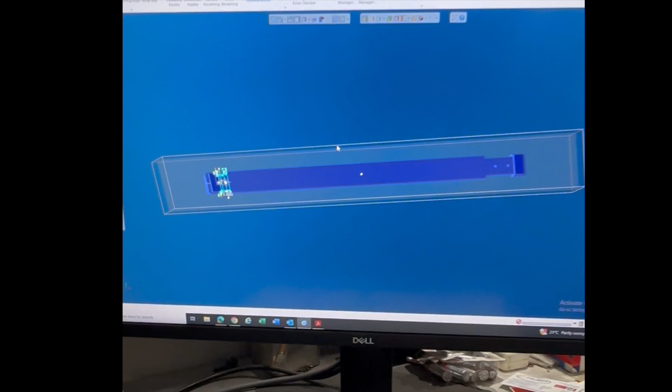We'll get it going for you. Okay, so here you can see we have a part. I've already drawn the previous one, but what I like to do in Gibbs is use all the same tools and basically the exact same processes. It's just a different part, so it's like a family of parts. So what I like to do is draw it with what we have, and then I'll use the same tooling to do the job.

So here we go, I got her set up. As you can see, it's 185 inches long. And I kind of have not the best setup, but hey, it'll get the job done. Sometimes that's what we got to do. So yeah, well, I got X, Y, Z, 0 all picked up, and we'll get into it.

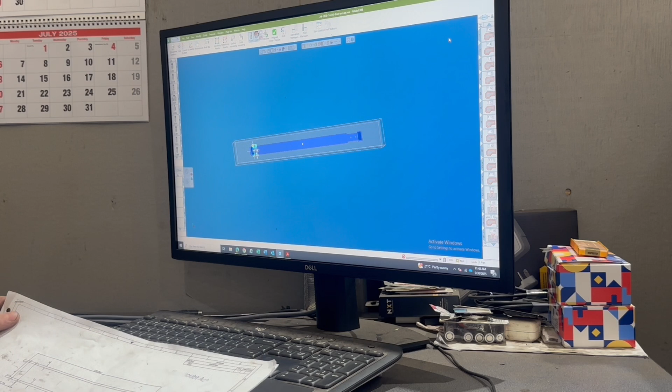So we'll start with building the model. Okay, so we'll get started, and if you have any questions along the way, just ask, write a comment. I'd be very happy to help you guys out with a problem or to show you how I've done something.

That's fine with me. So what we're going to do here now is we're going to keep our processes, and we're going to use the same process, same tooling, just on a new part. So we'll get rid of this part, keep it in my body bag, and I also want to keep the geometry.

So what I'd like to do is create a new work group. So that's now, get rid of work group 1, I'll leave that. So we got work group 2 and 3. So we'll keep going with 2.

Okay, so what we'll be using in this video, I'm going to be using the geometry tab, is this guy. We're going to be using the solid modeling tab, and we're going to use some of the features inside of here. This is a pretty basic model, but it's a good way to show you guys how it works.

Okay, so when building, you got to start off with your datums and your zeros, and that drawing will call that out. So here we go.

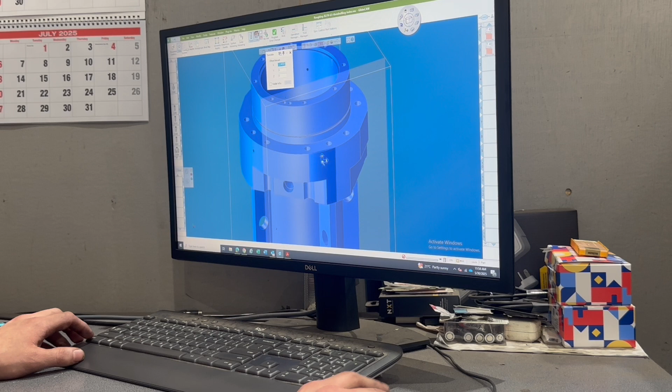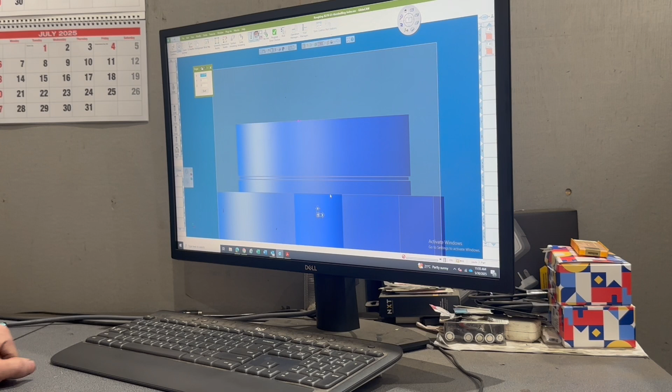All right, so you guys just saw some live action there. That's pretty damn fun. That's how shop life goes, right there, boys. Ladies and gentlemen, sorry, I won't look at those boys, include everybody. Yeah.

So, in short terms, what we just did there, we just finished drilling and thread milling this hole here on this face. Now we need to rotate and pick up my zero from the knot in the center of the table. He's going to put a bolt in here, and he just asked me for the dimension to the center of this hole. So that's what we just did there. And now we can go back. Hopefully it's lunch, so the guys leave us alone, but we did it for a bit. Shop life.

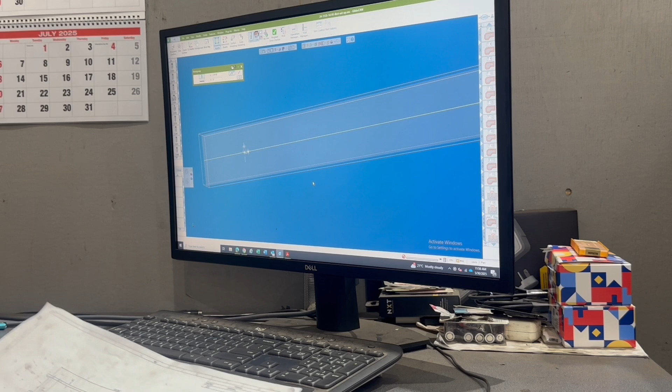Okay, so now we'll start plugging in the dimensions of what we're going to be working on and what we're going to be building.

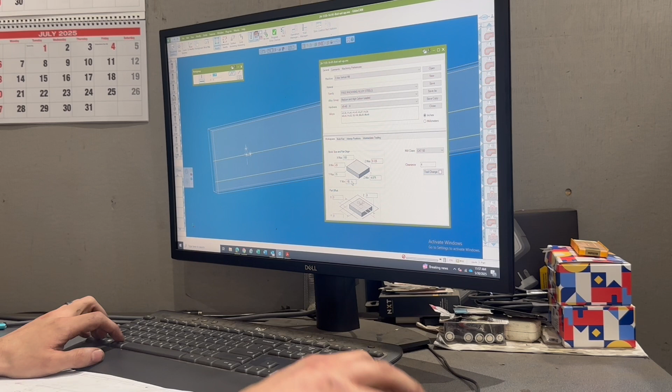Do the larger part, so I'm going to make the very single... okay, so off my zero.

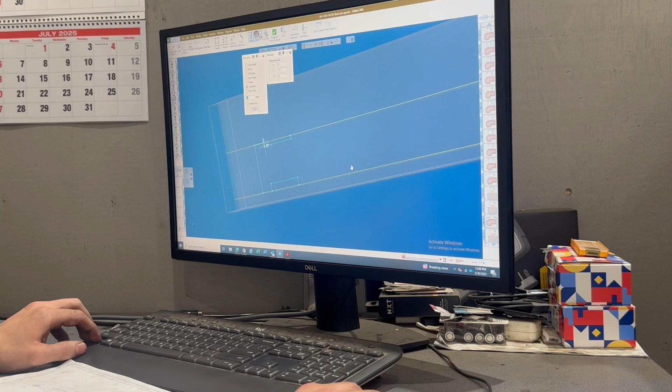Okay, so now we've created our pocket, our cart. Basically, we just created this edge here. So now we're just going to follow our dimensions and we're going to create this side.

From my 0 to that other shoulder is 173.75. So, 173.75 to it. Whoa, come on. Yeah, I didn't even adjust my screen. So 100. And let me go that way.

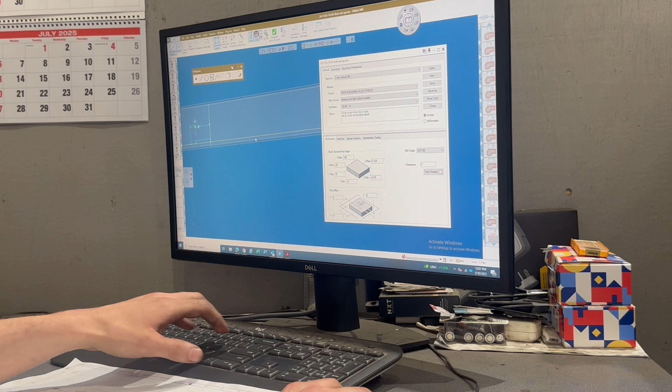If you don't adjust your screen, as you can see here, the geometry will not extend out that way. So these two pieces, I gotta delete these guys, put them back in. It's not a problem.

Okay, so now as you can see, we'll have our full length. A little trick: if you also don't have that window, you won't be able to go out and machine outside that window either with that geometry. It won't allow you. So this is almost like it's your geometry and processing machining window, let's say.

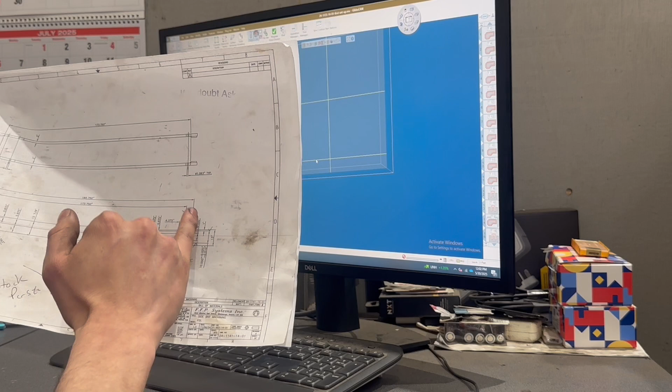Okay, so now we got those straightened out. Let's put our line now back at 173.75. Turn right, yeah. Okay, now I like to use duplicate the transfer because I have all details in here from that 173.75 dimension.

Now, 104.75. Create this step again. I do want this. Oh, you see? Because I created that in that window, now it won't let me. That's fine.

So we just create a new line. Likewise here, boom. Okay, so now I've created the pocket. Oh, just also a good one: if you're using geometry and the tab's still active, it's going to activate every line. So it's almost like it's a sticky function. It kind of sucks, got to make sure you exit out of that function. And then you can continue marking.

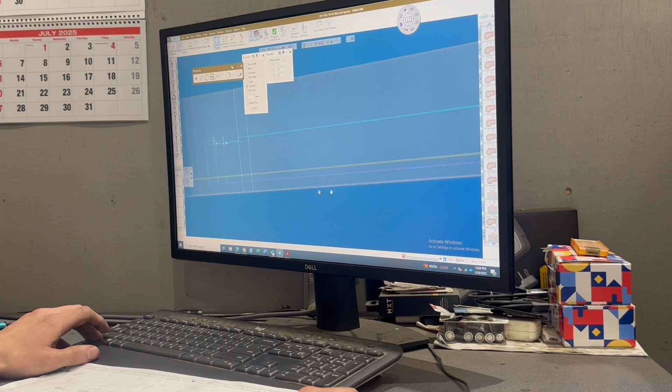What do we got going on here?

Okay, so now this is our basic geometry, and if you're worried about what you've done, you can now come in and select your dimensions. And a little trick with dimensions is you got to press and hold Control-Alt to get your size. It won't go there, but double check before you make your model.

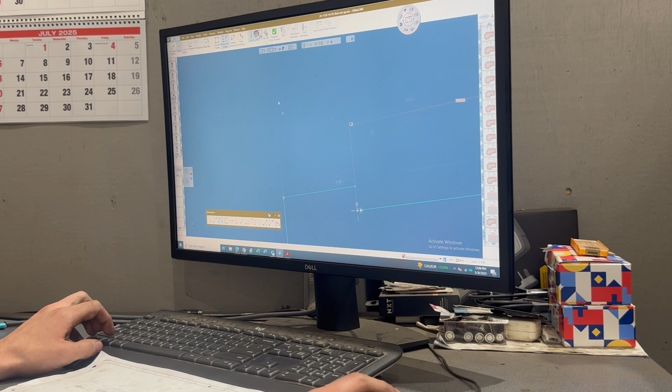You need 16, I need 6. Holy fuck. There we go. And I need 13. Boom. Nice.

173.5 for... 173.75 and length. Right on 1, and wide here at 0. Beautiful. Beautiful. And I should have...

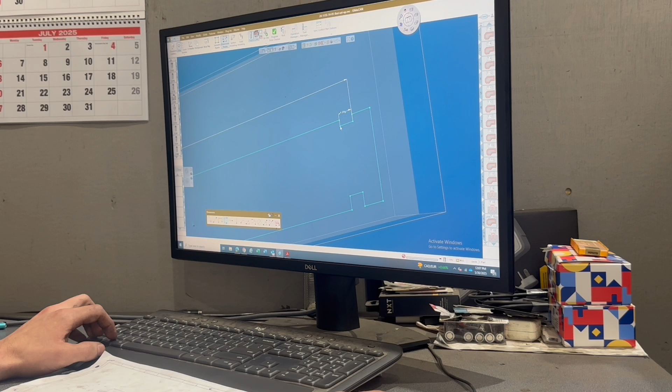Okay, and now we actually can take this geometry and make a model. Well, let's do that.

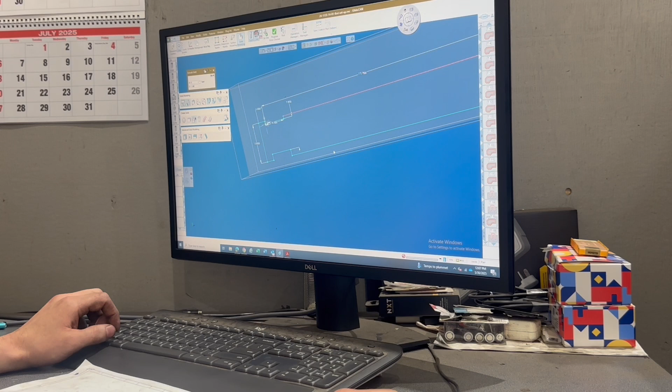Modeling tab function, we're going to use this one, create a solid, extrude a solid. So right now we want to go on Z, we don't want anything, that's our 0. And we're using 2-inch plate, so Z minus 2 inches. Do it. Select the geometry of the shape you want to do and select do it. Boom.

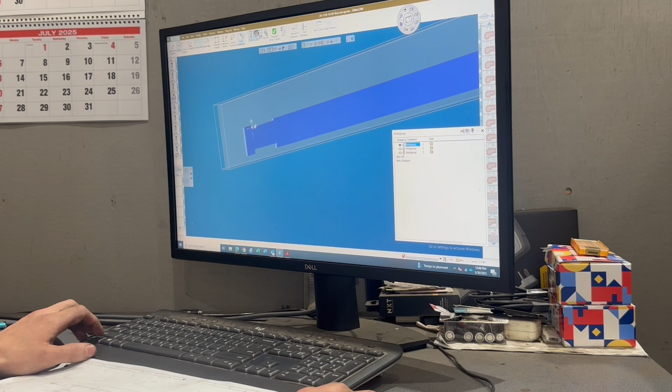We don't want a chamfer, we want a 1-inch radius. So we select radius, 1 inch. Have your edge selection activated, select the edges that you want to do. Okay, for the other side, same thing. Do it. Boom, we have a nice 1-inch edge. Love it.

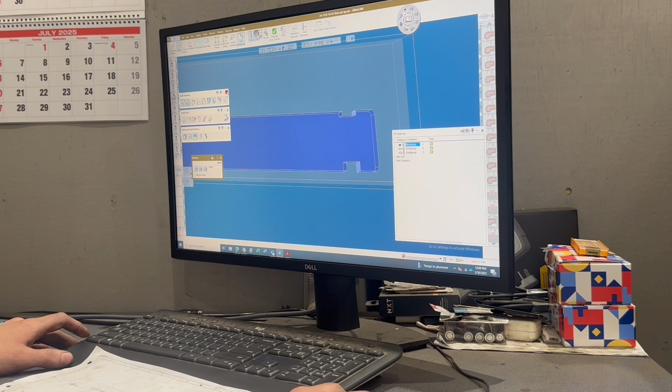Okay, now all you gotta do is cut the holes in it. Okay, so now we'll set our origin. X0 is already in place, Y0 is already, X0 is in place, Z0 is in place. We need to shift our Y down 5.875.

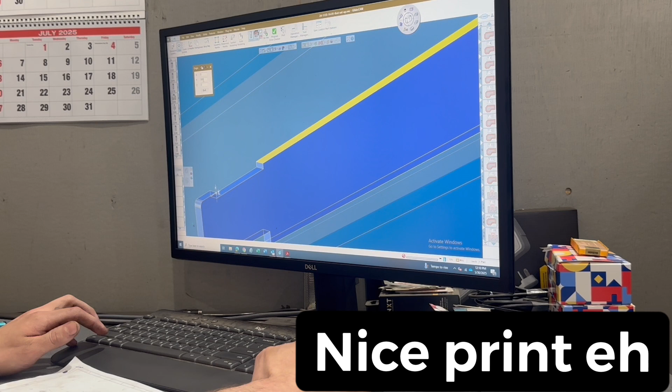So now, from edge to edge, that will give me... oh, no, oh, I'm in the pocket, sorry. Move my origin up. This face here is our origin, although the datum comes from it. Now we need to go minus 5.875. Enter.

Now if I check the top edge, it should be a positive 5.875, which we have. And then the bottom should be 6 inches. And it's not, why not? Oh, sorry, 13. Okay, so we got 5.875, and we have 7 inches to the bottom of it.

Let's slam our hole. So they're on our Y center line. Oh. Y0. Do it.

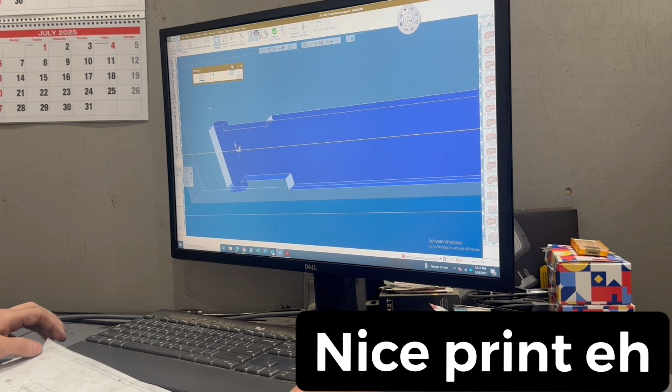Now for X0, we want the hole to start at 3.5. So we'll draw a line there, and then the center distance between the two holes is 9 inches. So we can do 3.5 plus 9. There's our hole position.

We'll connect the line to give us the geometry for the center hole. Delete the lines, create the hole that we need to, which is a 1-1/16 drill through hole. So our radius of that, diameter 1.062 divided by 2 to get a radius, 531, enter.

Those are our hole positions for right here. Now, back into our modeling, back to our extrusion. And now this one took me a while to learn, and this is helpful indeed. So now when you're going to be removing another solid from a solid, you have to have an edge to select. So make it easy for yourself, because we're eliminating the hole from the plate.

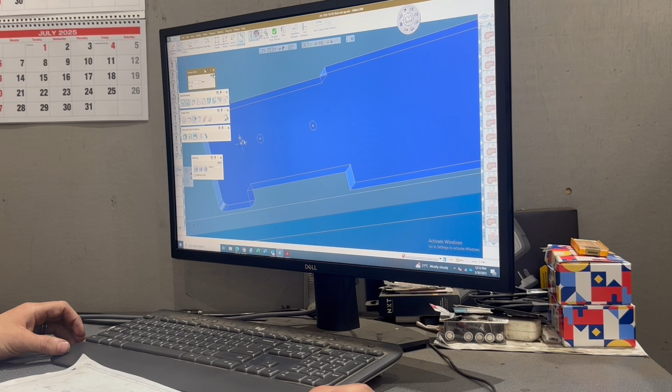I'm going to raise the hole model up 200 thou, and we'll take it down another 200 thou. Select, do it. Oh, I did mine at 200. There we go. So now that gives me something that I can see, and I can select it.

Another one that's took me a while to learn. Select the model that you want to, how do I word it? Select your main model first, then select your new models you want to remove, and you'll use subtraction in solid modeling. Boom, there you go. Holes are in. Go to our other side.

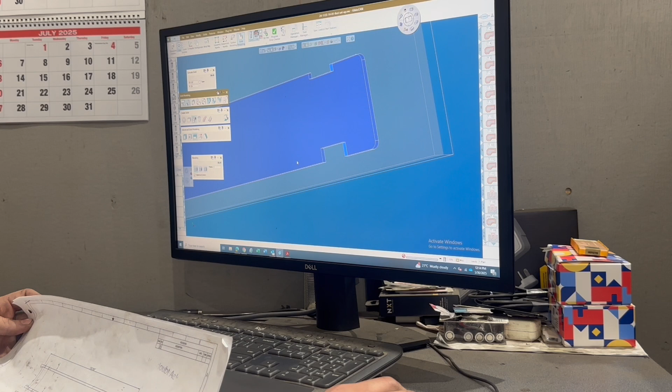These holes are vertical. I want to extract this line because that's where the center line of the holes come off of.

Modify, translate. Center of these holes are minus 2.125 from that edge. We got our Y0 from Y0.

There, a 6-inch spread. Let's see. Geometry, line, up, X, give us 3 inch.

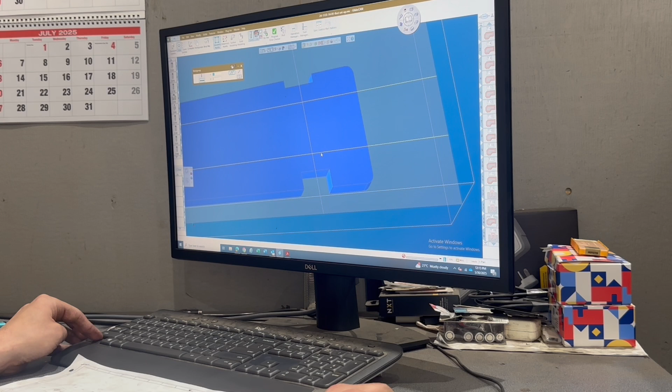Y minus, select, boom, delete it. Remember, you got to get rid of this tab if I want to delete that geometry, Esc key or it will not delete.

It is the same size hole, so we can use what we have here. Lovely. So modeling can be the same. And now we'll just move it. Okay, that is our part, gang.

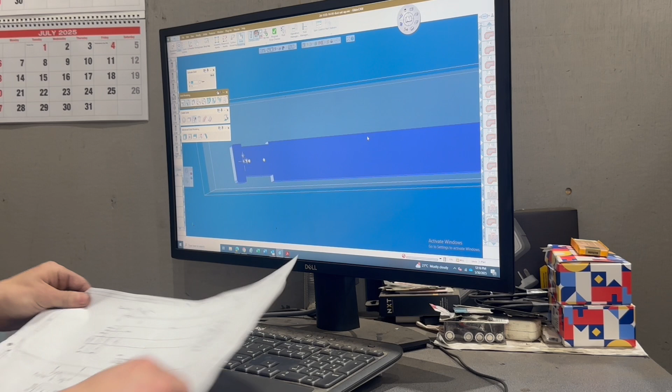Oh, actually I'm missing the 2 lines. So there are 2 1-inch pads in this region. I'm going to quickly make them here. So the pad actually just sits half inch in on X0. So this can be a pretty easy one.

We'll grab the geometry around, select the edges, grab it, get rid of, there we go.

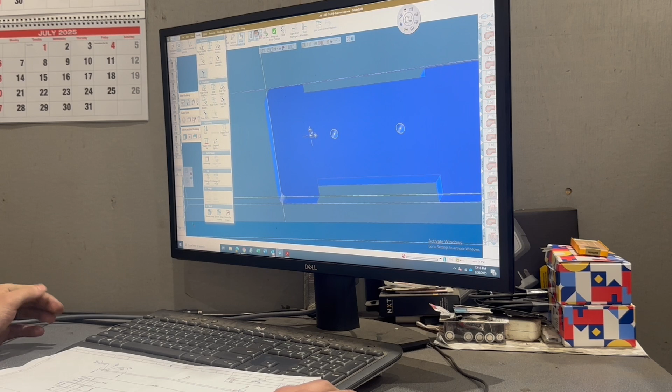And now on Y we want minus 0.5, plus 0.5, minus 0.5 on, or sorry, plus 0.5 on that. Now, as I said, it's on X0. Great.

Now we get into it. Same thing, now I connected all those. This block does have a radius on the outer corner.

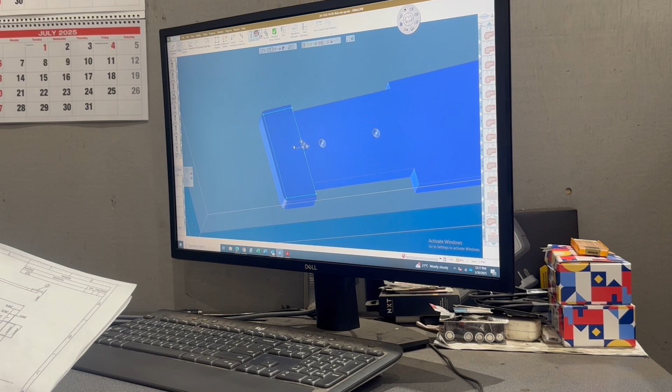Looks like a half an inch. So we can do it differently this way. I can actually do it the geometry style so I won't have to manipulate the model. Yeah, it's definitely a half inch radius.

There we go. Back into our modeling, and now this is a good one. We don't want it to go past Z0, so we set it at Z0 minus. So now, when I pick this geometry, it's not going to go deeper. I'm telling you not to.

But we know it's a 1-inch plate, so we want Y plus 1 inch. Here we go. Boom. There's our plate. Let's add it. Now we've got a nice bottom.

Another thing I like to do is walk this now. We do got to do another pad over there, right? So, just a fun little trick too.

Here, near that geometry, we know from our X0 to our other pad, we know that dimension, which is 173.75. So now we can go to modify, translate, 173.75.

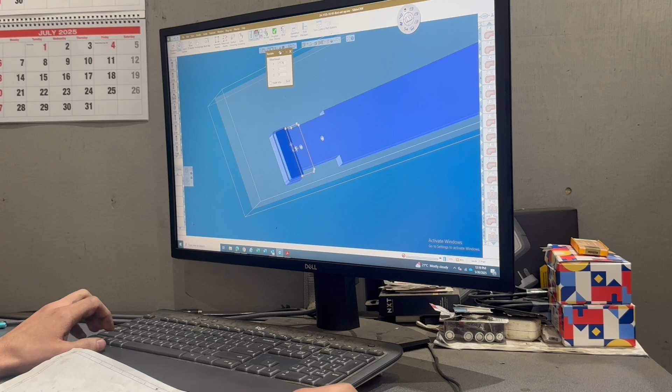Oh, whoop, this is the model, sorry, just the geometry we want. And as you can see, it falls right into place.

Same thing. Model, turn, go, click, click, go, boom. Actually, I did that backwards, so that's why I changed color. Click, click, boom. There we go.

Okay gang, now what I haven't done this whole way along, and you'll learn this lesson one time if you get into this, you have to save. I have not saved it, so let's do save as.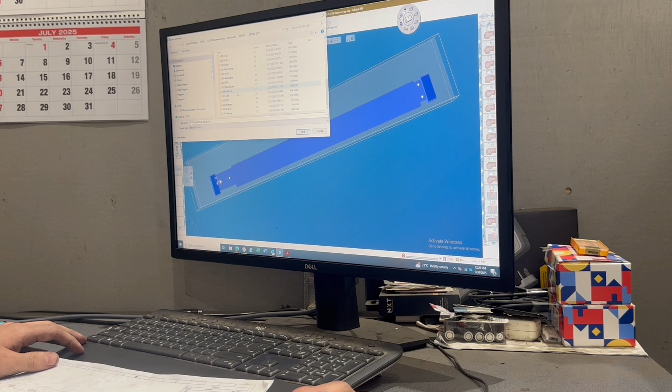This is the new job number. Where are we? Create. Organization is key, new folder. Gibbs programs. Boom. Drawing number. I like the first setup.

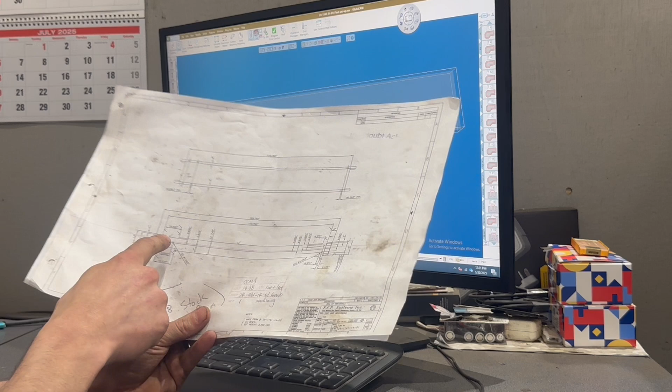Okay, so now that is the way the drawing is on the drawing. We'll go over to the part, I'm going to show you. I actually use the machine edge, I machine that first, so that will be my Y0 all along.

So right now I have this part actually set up inverted, and it's the opposite piece. Okay, so I'm actually inverted, which is fine. I'll bring you over.

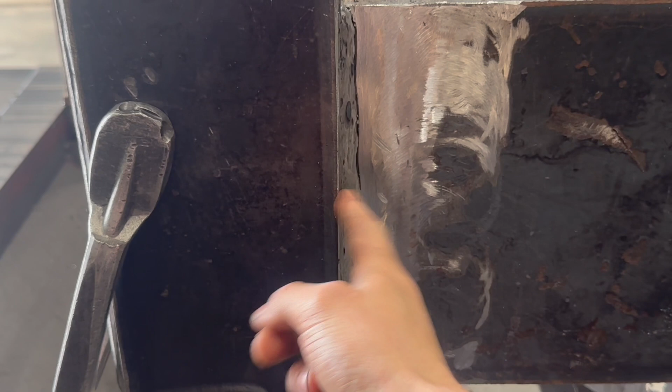So this is my starting detail. X0 is on this face. Y0 is on the bottom. And Z0 is on the face here.

So I do have a left and a right, and I actually have the left-hand side on the part, on the machine now. So this might be a bit confusing, but left and right. I like using my hands, very easy, left and right.

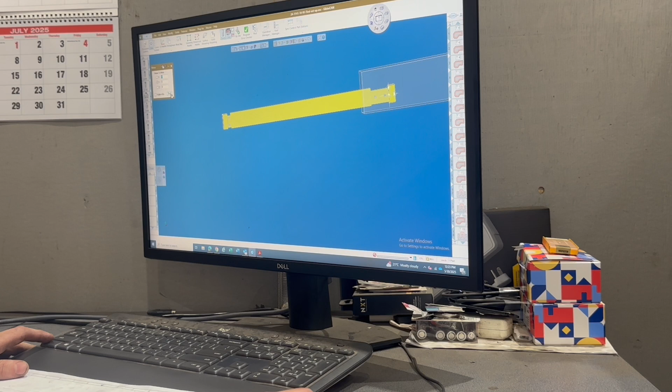So we're going to invert it and rotate it. To rotate. And now as well, we're going to mirror it. On X. Nope, sorry, on Y. Oh no, I did that wrong. Let's not do that. All I need to do is mirror it on Y.

So now, my bottom has become my 0. Perfect. Top here should reach 7. Nice, right?

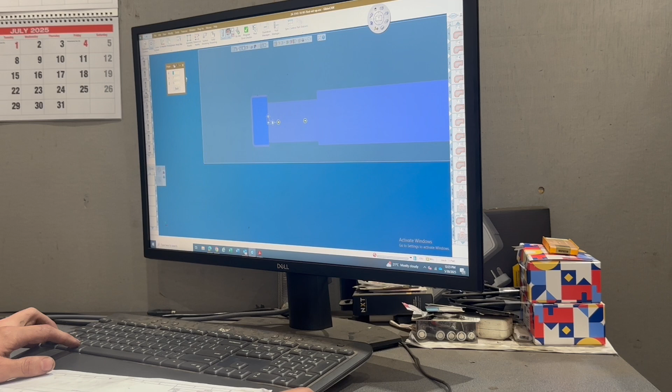So now this is exactly how we're sitting on the machine and how, actually that's a line, I have Y0 on the bottom. Let's move that, because they'll always stay the same. Boom. Now, we can start extracting geometry and getting into it.

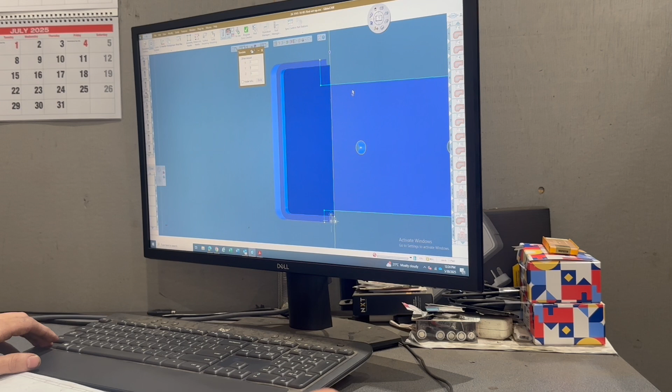Another thing I like to do is manipulate all my geometry to make sure I don't get any boom booms or anything. It's just a safer way of working. Takes a bit of time, but at least I know what I'm getting myself into. And then I'm clear.

So right now I'm just giving myself some edge room, and reconnect each geometry. I'm using a 2-inch cutter to do this and a 1-inch. So like I'm high enough above, I like to give myself at least 100 thou, 200 thousandths.

And the same for the top.

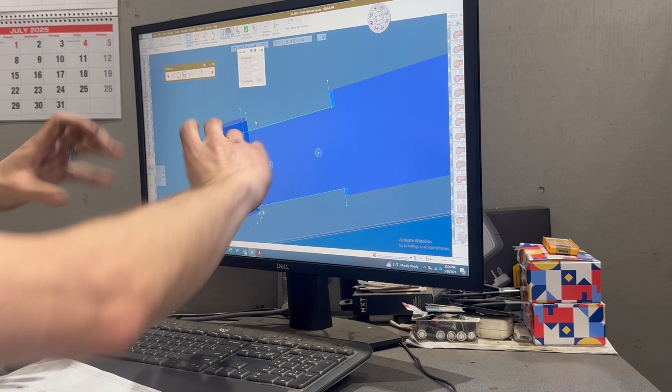Now, because they want a square shoulder in here, I use a 2-inch cutter, then a 1-inch cutter, and I actually do another setup where I lay the part down and just come in and take these, hit that sharp corner. So, give myself some relief.

So the 2-inch cutter, I'm going to want to put a radius in the corner so it doesn't slam in there. 2-inch cutter, so 1.1 is good. Everybody's happy with that. Cutter will come around.

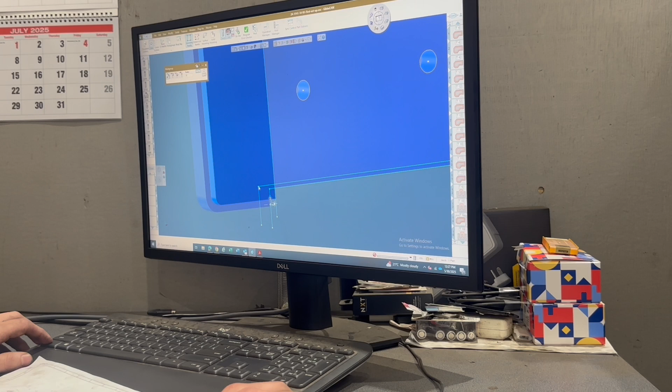Likewise, 0.6 for the 1-inch. And we're good to go, guys.

204 is my 2-inch high feed. This is a function I don't like. When you use a different geometry for a workgroup, it repeatedly comes up when you click it. Anybody know how to make that not happen? I'm all ears, I'm all ears.

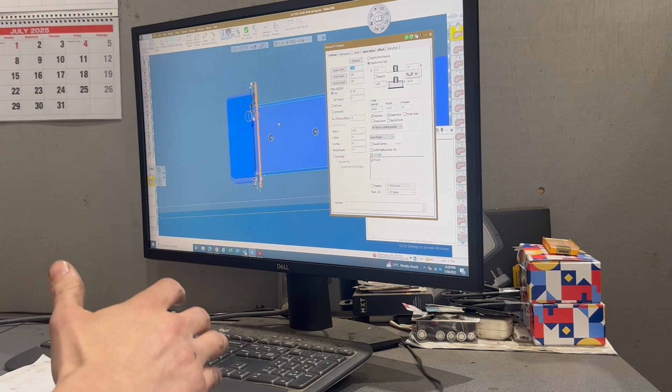So now this is where I was saying I'm just going to reuse the function I did on the last piece, because it's a family of parts. First time doing this one for us, but the tooling will be exactly the same.

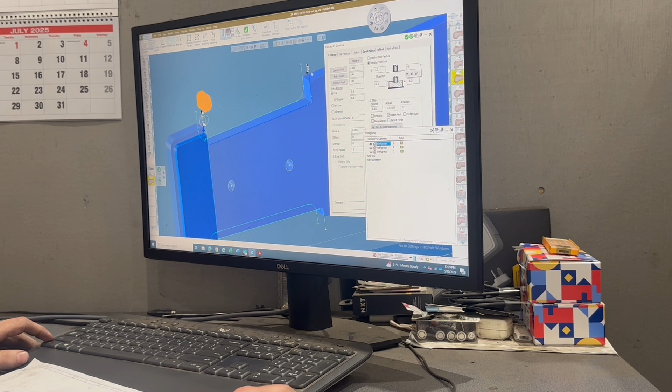Yeah, that's what I'm doing here now. I like to come in with the finishing, a 1-inch finisher, to give the radius as small as possible. So what I like to do is take out that meat that's left by the 1-inch or by the 2-inch roughing cutter.

Ooh, that's really good, there we go. So that'll just come in there. Bop, bop, bop, bop, bop. We're going to run a 1-inch high speed, 1400 RPM, 140 inch a minute.

And we'll do that process to all 4 corners. Come on, baby, wake up. So, there's you. Let's do a save thing.

Same thing. So this line, start always out a bit, not gonna hurt anybody. And clear the edge. Oh, mommy, that doesn't look good. There we go. So that's cleaning out that shoulder.

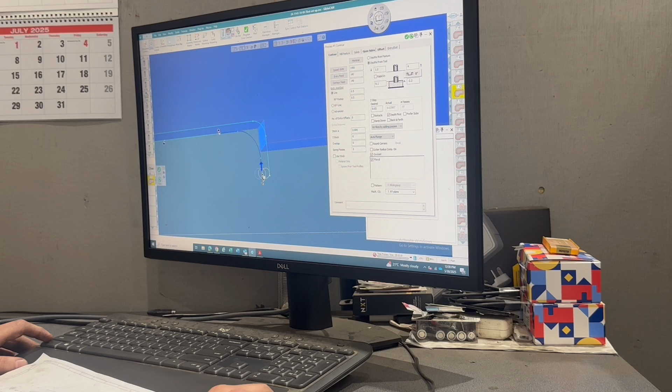Don't need to come out so high.

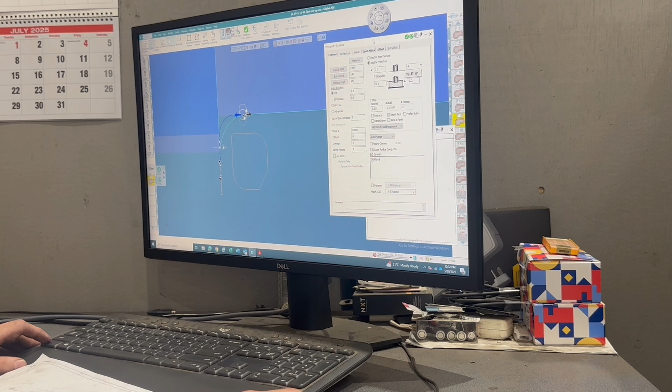Alright, do a 10. My 2-inch finisher. I like to, well, my finisher, the high feed for rough finish and finisher for finish.

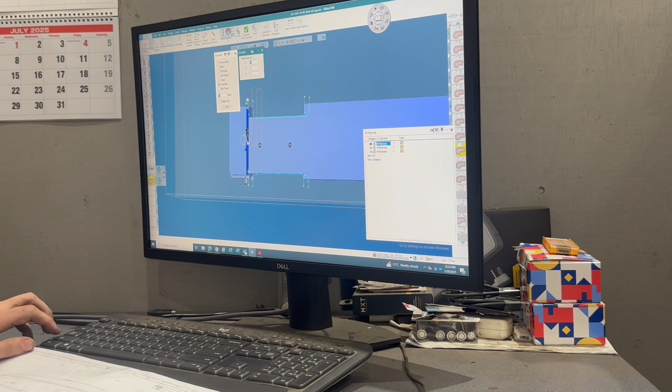Well, I do like to face this as well, so we'll do this here live on. So we'll take this line, we're going to duplicate and translate it. You need to be 2 inches off because we don't want to have a little boom boom.

Okay, now, back to our geometry. We'll use a point, boom, boom, get us going. You can start up top, these two. Duplicate those lines.

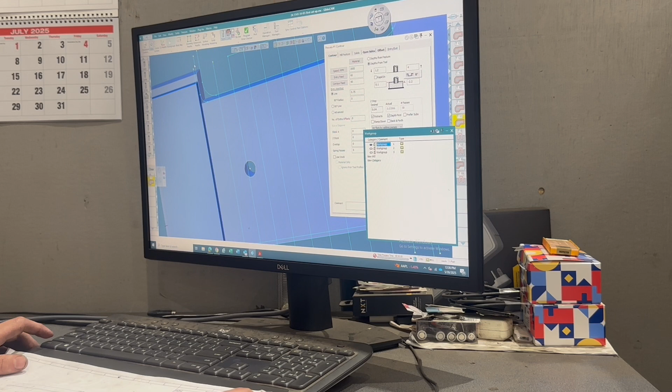Get back around the base. Okay, those functions are done.

Now we're going to want to just drill a hole. I always center drill, always center drill. You know why? You can check your part. If you're out, you will see with that center drill.

But we've already put all the functions in. But I always center drill, don't care. Safe and sorry.

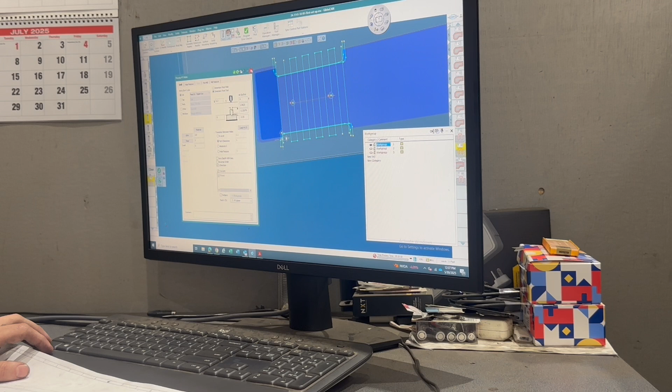Redo. Redo number 5. Yup, 18 is our drill. Five. Number 5, I like the chamfer.

Now, because I'm shifting the part, I like to give myself a dowel hole in the middle, or a pickup location.

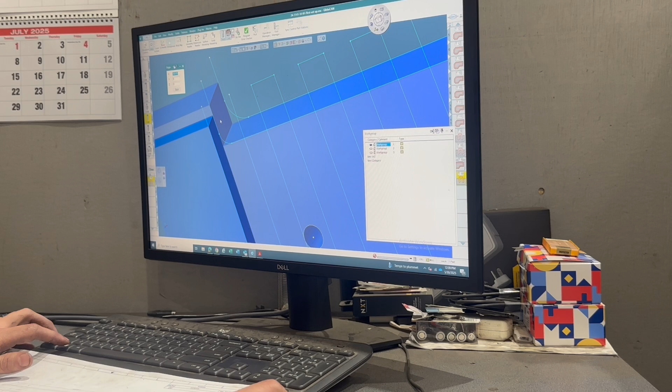Double check that I picked the middle. I'll move my origin. And now shoulder to shoulder should be the same number, 86875. Beautiful. Minus 86875. So we're good to go there.

Let's move our origin back. Nice. And now we can drill that hole. Read it. Beautiful.

Once you finish, always save. Wait till the day you do all this, and then you go to save and it stops.

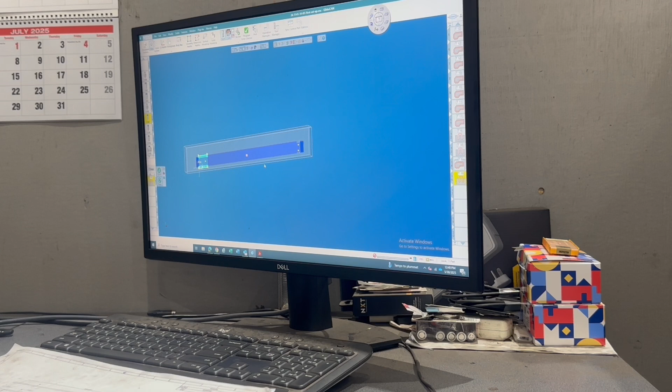Okay, so now, what I like to do, I'd save, let's run it, and see if I made any boom boom. Oh, I love it.

That looks nice. Oh. What do you mean? So what?

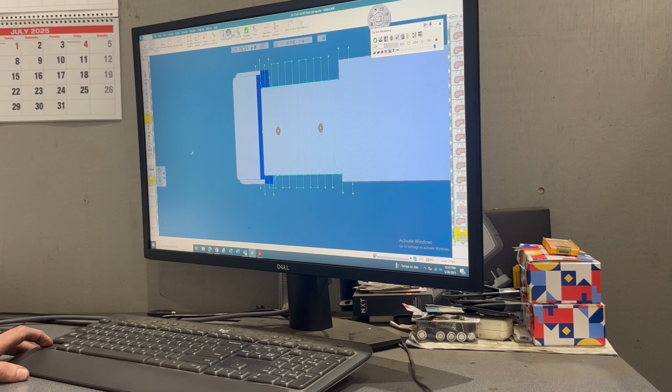Sorry, I scared the crap out of me there. And yeah, so we checked. And you'll go, oh man, how do you know that you're doing that? Well, what we also can do now, I think, you know what I mean? Nah, it won't let me.

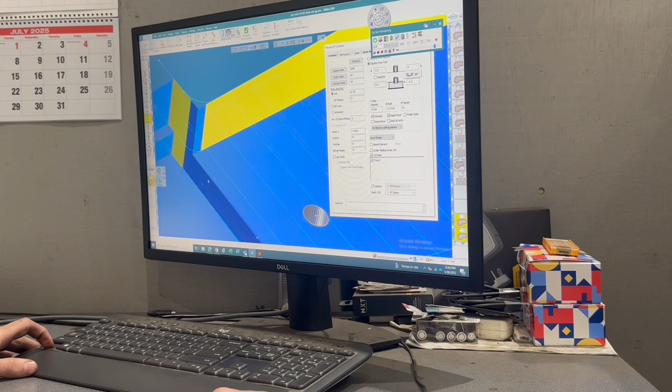What I like to do, and this can cause trouble so I'll suggest don't do this, is run the finish cut and throw a one on it just to see. I'll do it as two new operations so I don't get confused with the two I have here. Now I'll highlight them and rerun, and you should see it'll tickle each side. There we go. Okay, so that shows I know now we're good.

Okay, now delete these two. There we go. File, save again. Run again, make sure you didn't do that. Beautiful.

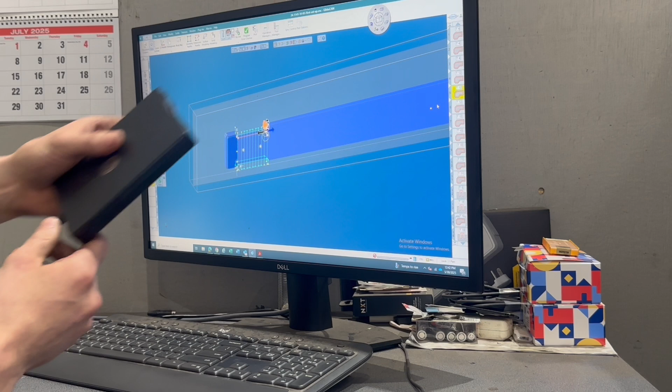So now we're good to go. We can take this, you guys will love this. Put a floppy disk in. But the first one is the fast one.

So this is really good about Gibbs. I'm going to post and do everything right here. Post, make sure that you're posted for your machine. Anybody needs a post, we're all friends now, your boy has thousands of them if not tens of thousands. Hit me up, I'll help you out. I'm using my Toshiba post.

This job number is 1435. I'm going to stick with that, but I'll put it in my folder. Oh, what's that, 34? Oh, 38. 38, again, new folder, programs. 1438. Save.

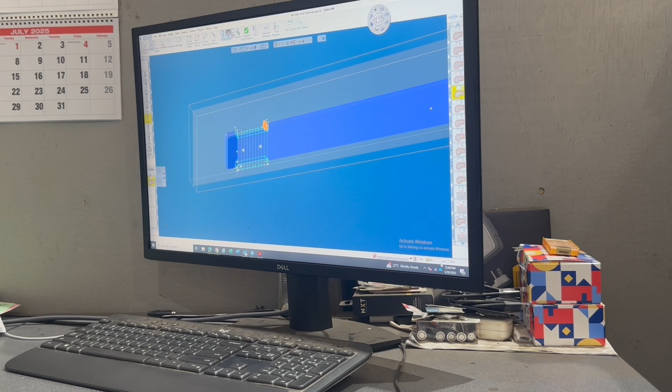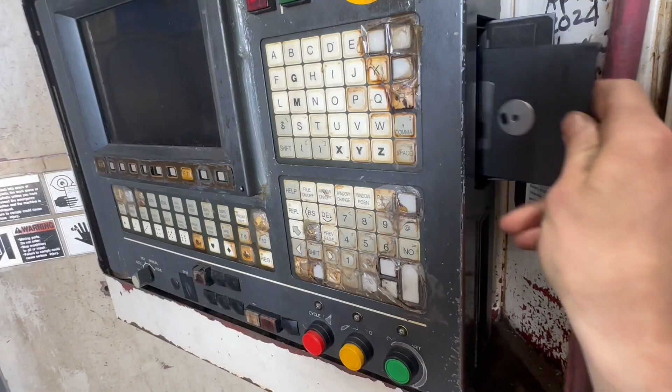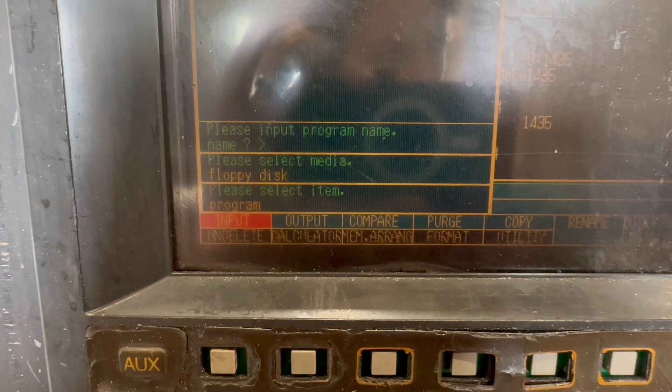File, input, floppy, and now it asks you what's the program number. 1435, enter, and you can see it's being inputted. Not a little program, so give it a couple minutes.

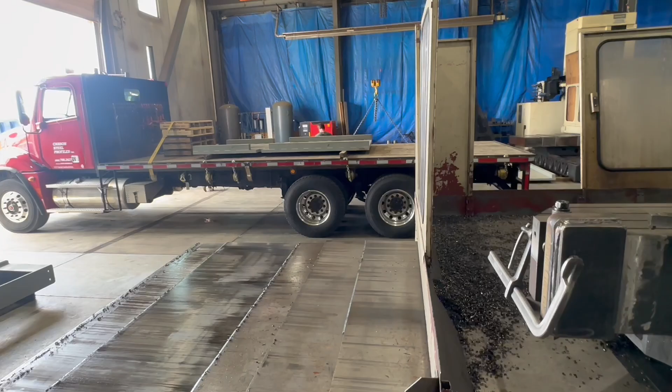And then we're going to get started. Everybody's working away. Love it. Oh, my memory was full. Of course, okay, purge memory program. Let's get rid of 100. Enter, yes. Purge memory auto.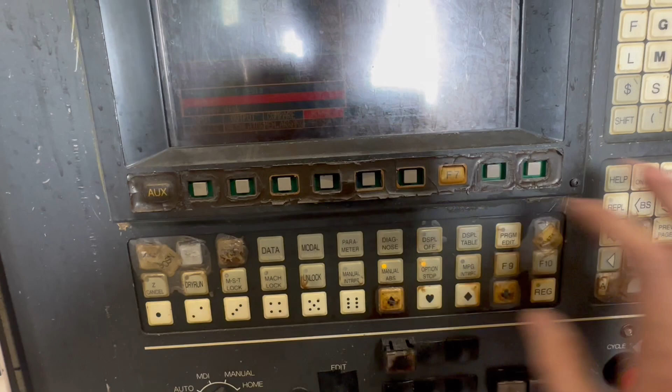Another thing you can do is put space, and as you hit it and scroll, it'll highlight them. Let's get rid of those ones. I hope this will help us. Enter, oh sorry, space. Enter, oh no, don't want to do that. Yes, okay, let's try that again.

File, input, program, floppy, 1438, enter.

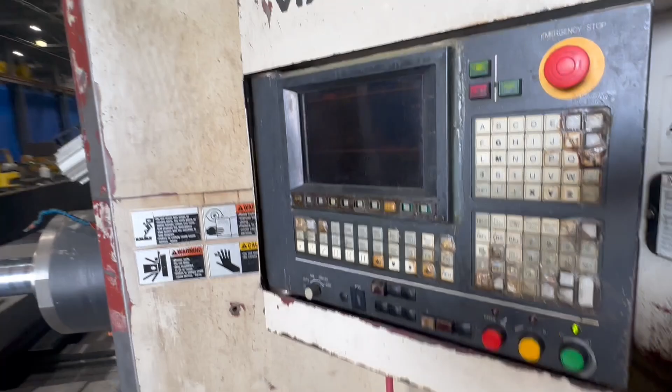There it is. Okay, exit, file off, auto, program select, 1438, enter. Let's rock and roll. Cycle start. As I said, we started with a 2-inch high feed.

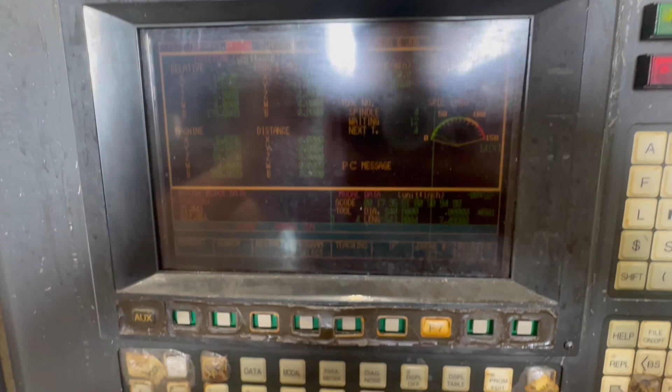So that, my friends, is how you build the model, process the model, tune the processing, and get your machine fired up. So literally right now we are running what you see there. I'll slow it down a bit. That's what we're running right now.

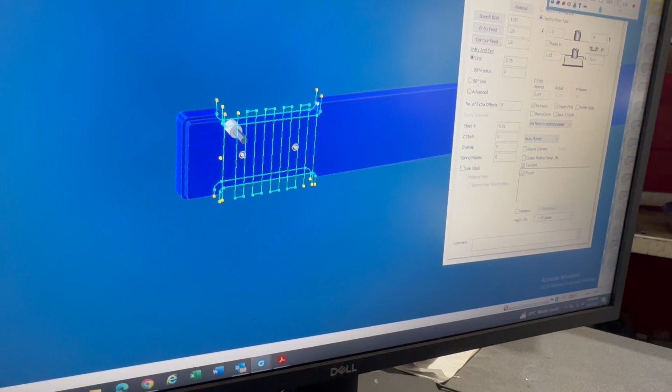Thanks everybody for watching, I hope you enjoyed it. I actually enjoyed myself. If I didn't explain it well to you, I'm sorry. It's a lot, and I think anybody in this can understand there's a lot that goes into what we do. And I didn't even get into it, this whole part has to be within a couple thou. I hope you enjoyed it. As I said, I enjoyed sharing that with you guys, very much appreciated.

And then let's see, this will probably run, I'm going to say 2 hours. See what the computer tells us. Hour and 20. Boom, the video was 1 hour and 7. So, got 4 setups like this, so hopefully Monday, Tuesday we're done.